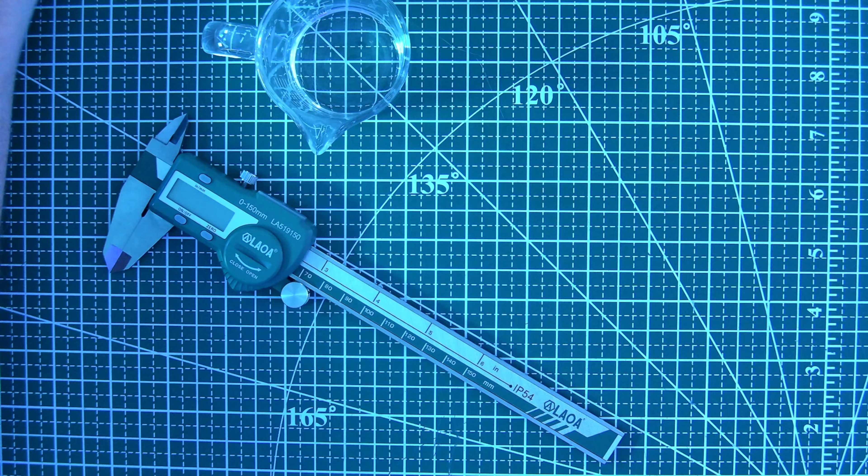So yeah, let's switch to the task, right? Oh, I need to use another mouse. Okay. Oh, I also need to... Okay. Wonderful.

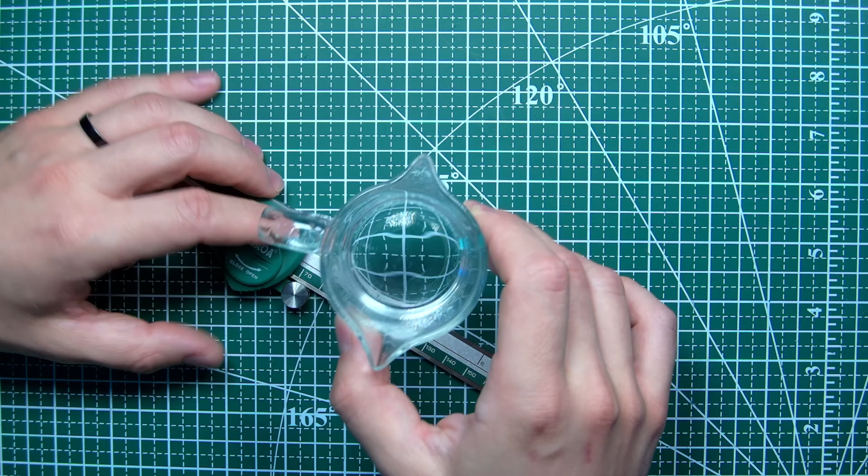So what do we have here? We have this espresso cup. I'm also learning how to make a normal espresso. Right now I can only make something not great, so maybe we will talk about that also. So here we have a two-dose espresso cup, right?

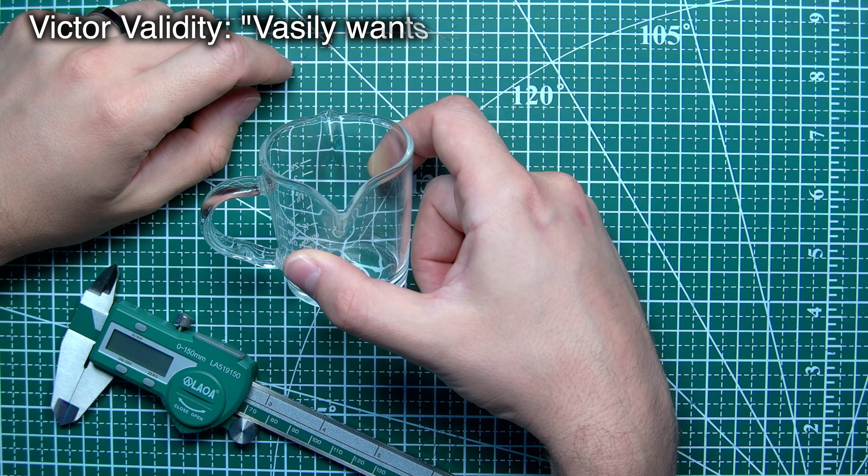So what is the problem? I also have a bottomless portafilter, and I have a lot of space between my portafilter and this cup, right? And with a bottomless portafilter, the coffee flow, a coffee thread, oh my god, I'm using programming words, the flow of the coffee, when it's going here, we may also have drops of coffee everywhere, right?

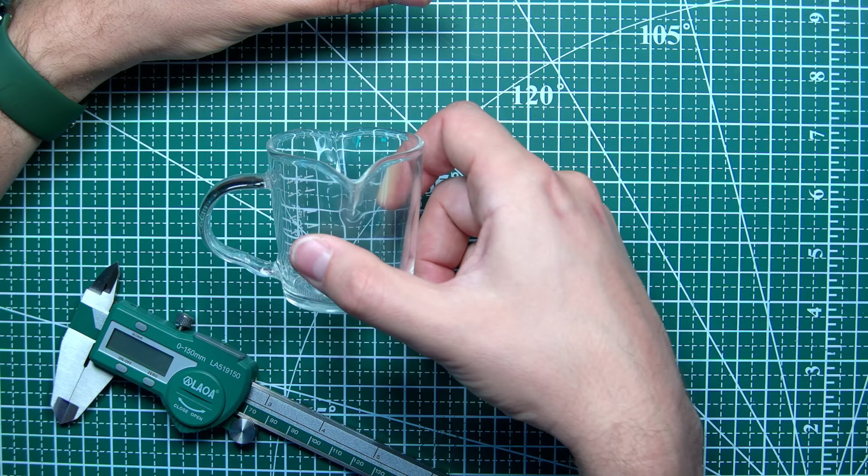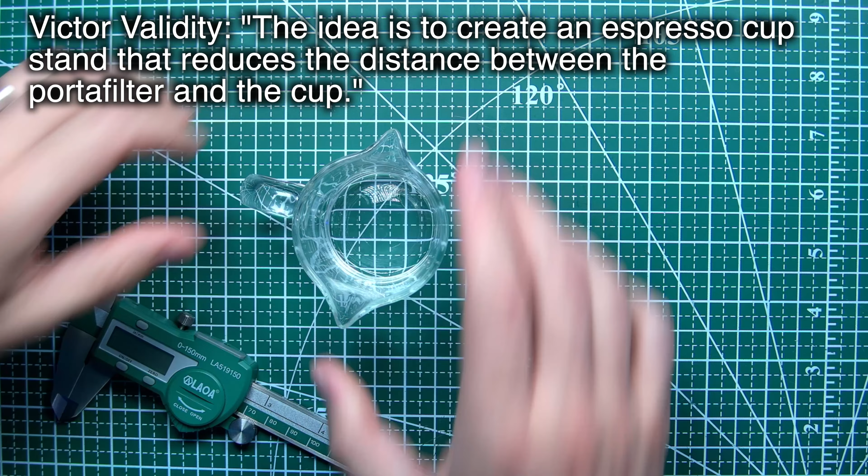So the idea is to have my portafilter and put this espresso cup as high as possible. So I need a small stand, right? Here I need a small stand. Okay, how will it look?

So I found something like this, but it would be smaller. So, okay. So I want to have this stand. So we will put our espresso like this, right? And also the diameter of it would be less, right?

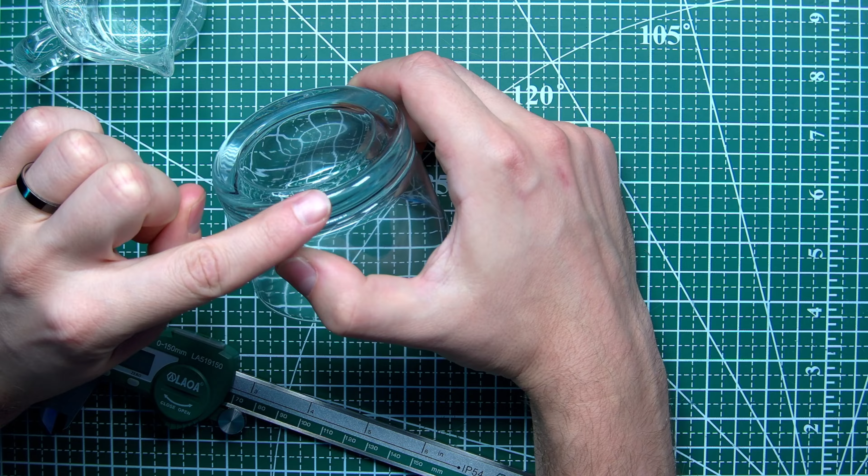And another idea, I want to have here a small border so that this coffee cup cannot be accidentally moved or something like this, right? So again, the idea is to have a small border, to have this kind of stand, right?

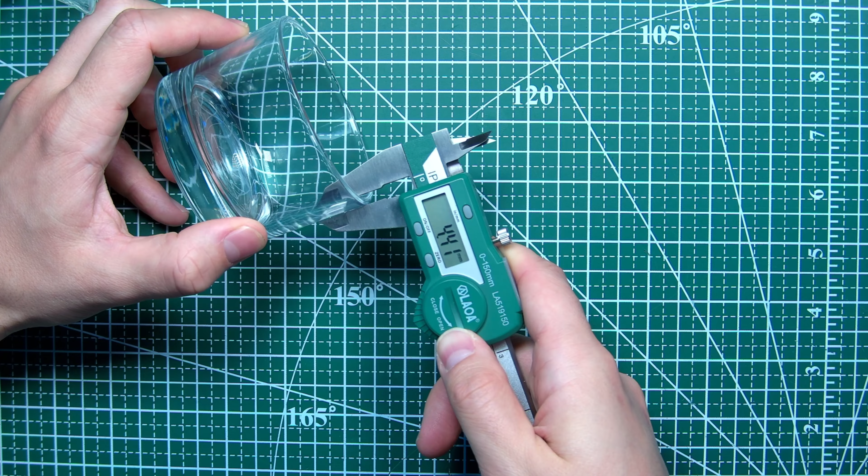And also, I do not want to fill it with plastic. I exactly want to have the same thickness of these, let's name them walls, right? Because I do not need to spend so much plastic here. And of course we will print it. Probably it could be another video, what result do we have.

So yeah, let's start. So first of all, what do I need? I need to measure this, right? So to measure this one, okay.

Oh my god, yeah, sorry, I'm not a professional YouTuber. I forgot to look at my screen to see where the cup is right now. I hope I will become better.

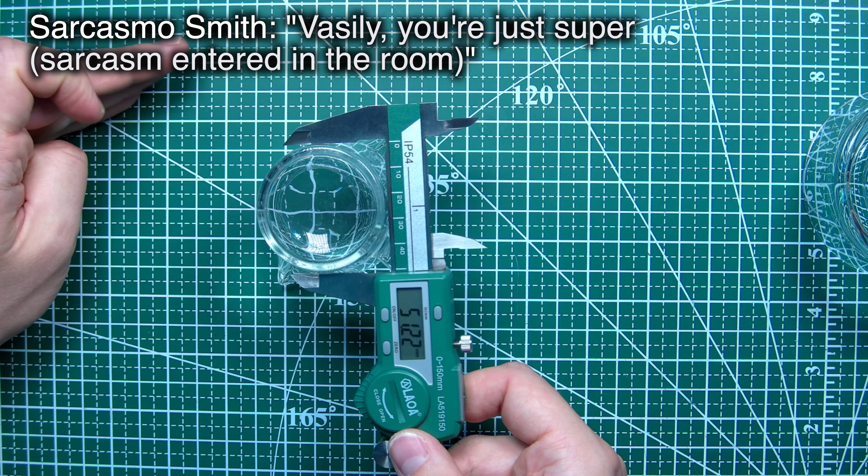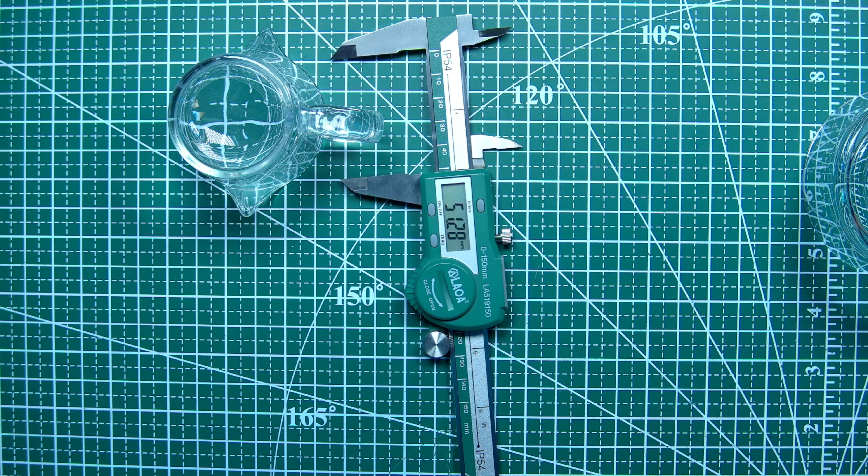So we have here something around 51 and 51, right? And 2 millimeters. Let's keep it for right now, and let's move to our project and start our project. So let me switch to my desk. So this one, wonderful. Okay.

So, as I said, I already created a project. Let's try to make another version, right? So create milestone, version 1.

Yeah, I had to delete the video, like 1 hour. Regularly I am recording videos of 1 hour.

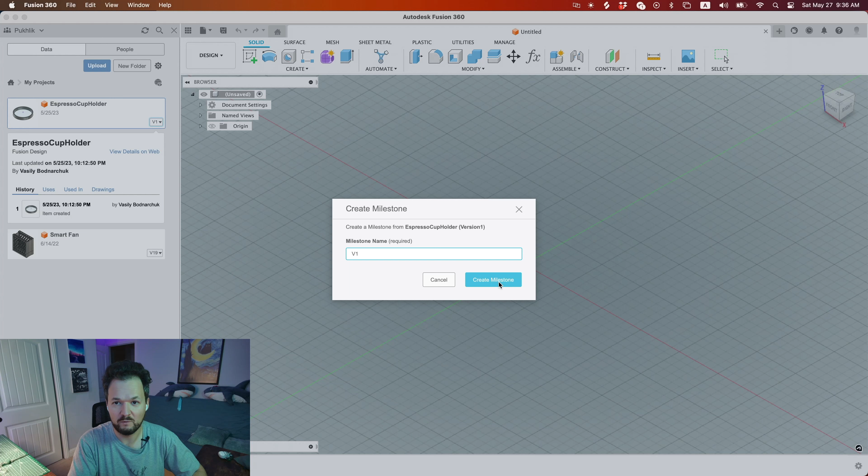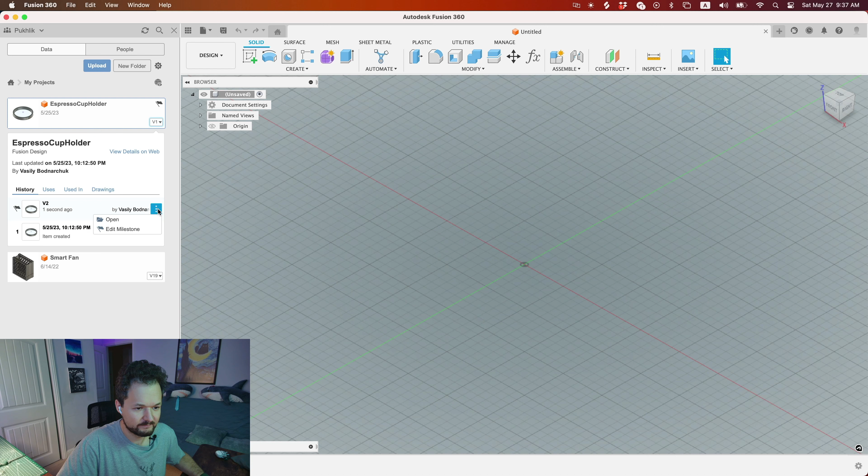Okay, so let's create a milestone, and then let's try to create another version and start from scratch. So, okay, and let's open it. Okay, this is version 2, right? And this is version 1. Let's rename it. Okay, I cannot rename it. Let's open it. And let's remove everything from here, right?

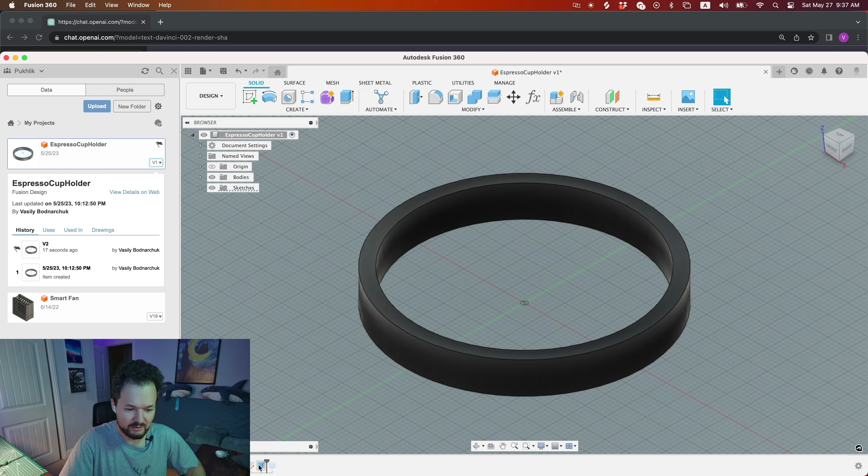Oh, okay, let me try to move this dock to another side of the screen. So position left. Okay, hope right now it will not distract us. And let's remove all of this. All right, let's start from scratch. Let's remove everything. Yep, delete. Yep, I know what I'm doing. Delete. Yes.

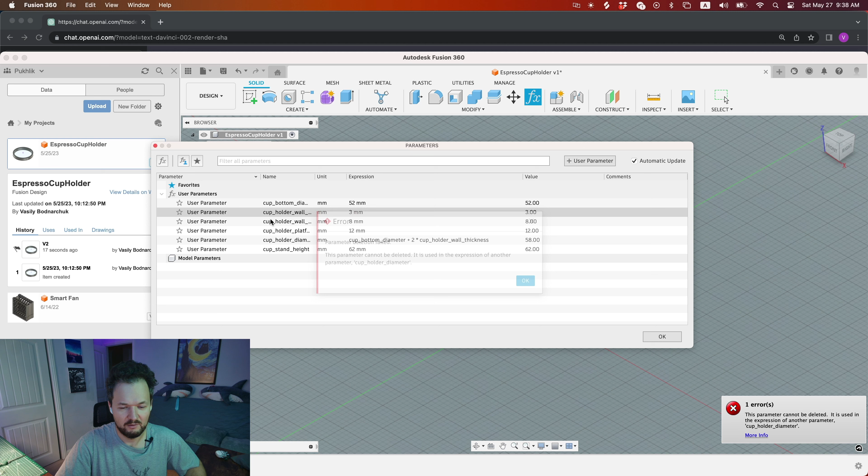Delete. So, and also we have parameters. Let's delete. Oh, why are they on another screen? Let's delete all of these parameters. Okay, I cannot delete them, so probably we will have this here. I hope it's okay. So we have here parameters, and let's start from a sketch.

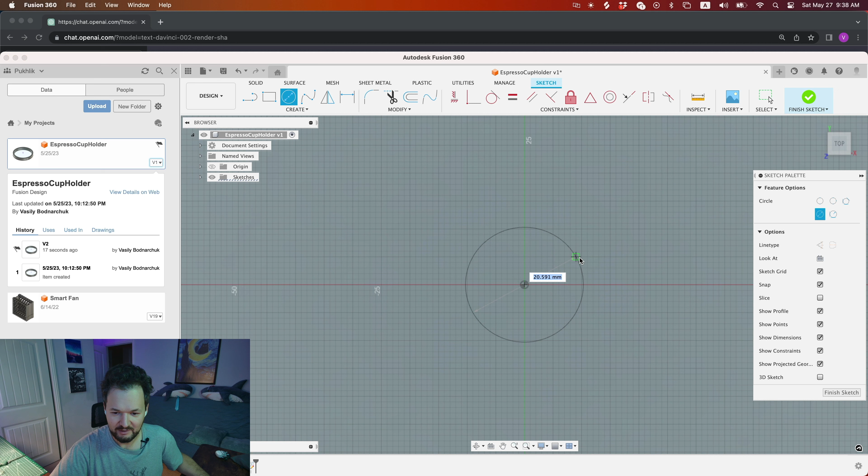So let's create a sketch. X, Y, right? Then we need a circle, right? Let me create it first, and then I show it on the model, on the cup. So this one, I can click on D, dimension, and let's set here. What dimensions do we have? These parameters I already entered.

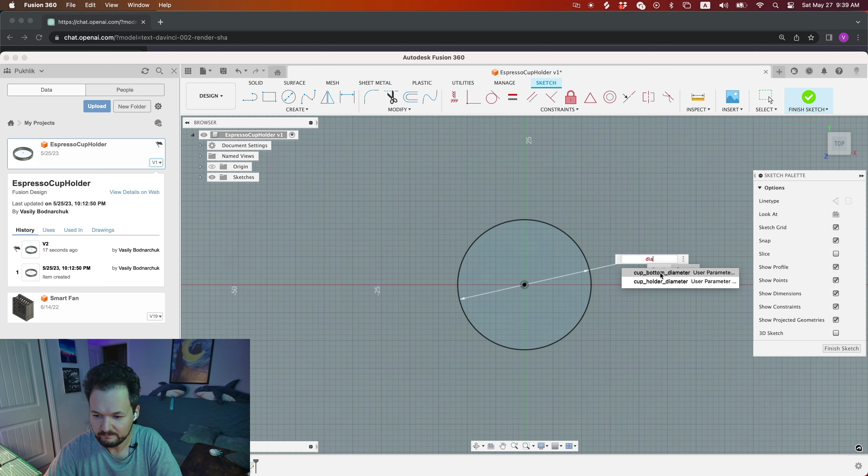So diameter, right? Okay, we have cup holder diameter. Looks like this is the whole diameter, right? Let's make it.

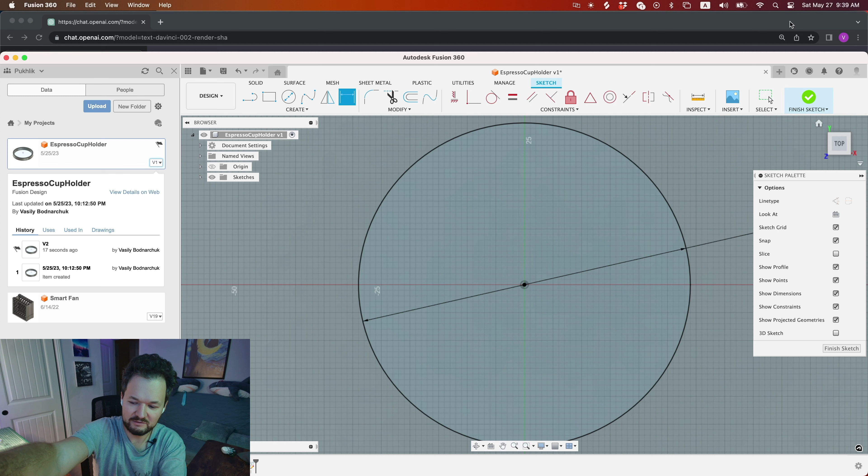Oh, I have another screen. I need to move that screen right now. Sorry, you see, everything is not professional. So, let's do this. Why can't it be? Okay.

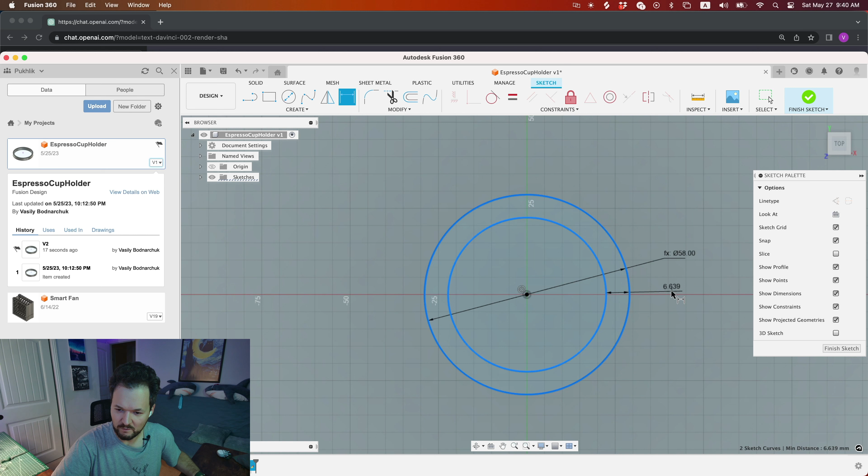So, 58 millimeters. This is the larger diameter, right? Now let's add one more diameter. We can set dimension D from here to here. No. Okay. Yes, that's what I wanted. And diameter. Okay, so cup holder wall thickness, right? Yes. Holder wall thickness. It should be like 3, right?

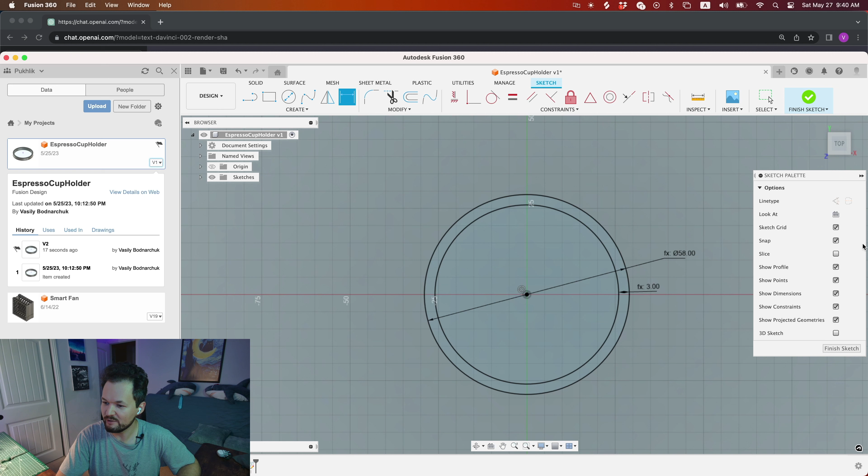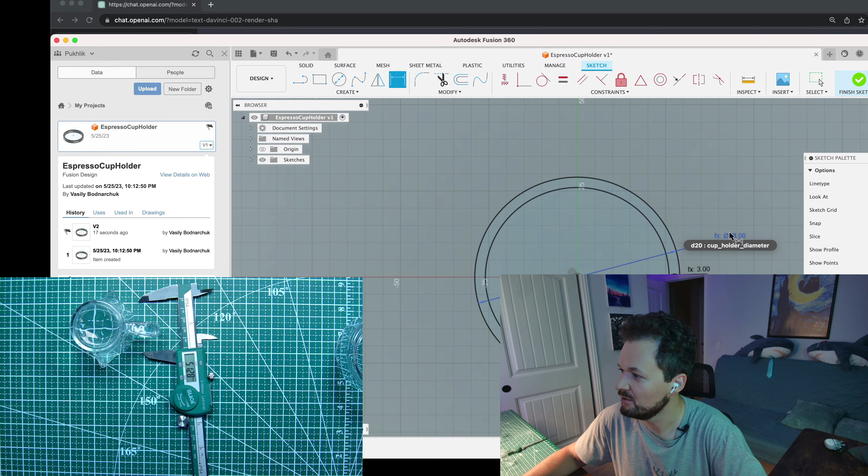So let me switch to another screen and we can discuss it. Can I try this one? Okay, this is too big. Let me make this smaller, and myself smaller. Actually, oh, it's wrong, right? This one. Okay. And actually you do not need my face here, right?

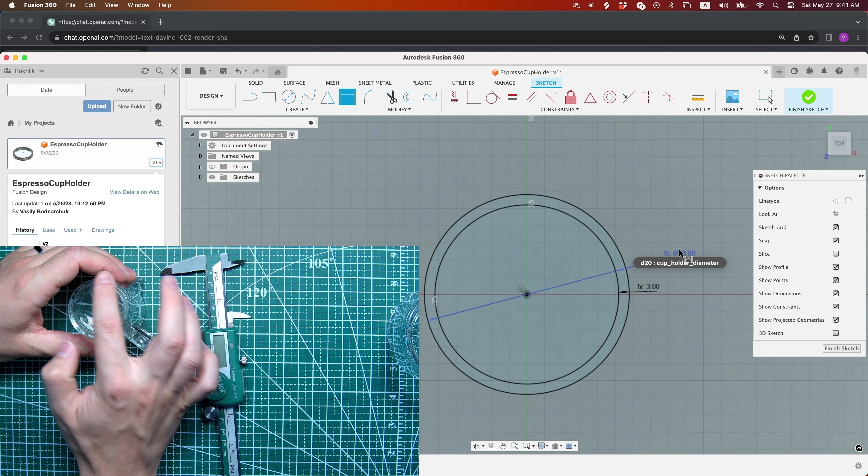Yep. So, look at this. We have this diameter, right? It is like 52, right? 52. Actually, let's check parameters. I think I set up a little bit different, right? So, like, okay. Oh yeah. Cup bottom diameter 52. Okay.

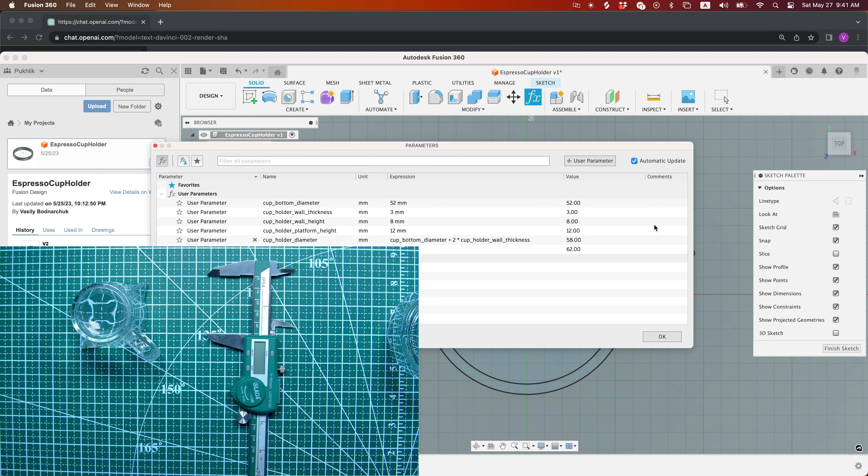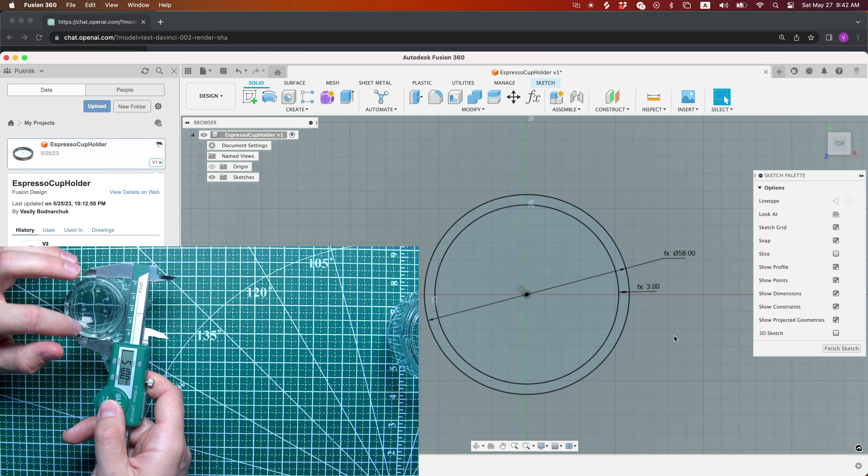So then we wanna have some border, right? So for border, as you see, we add 3 more millimeters, right? So this is specifically this diameter, like 52 millimeters diameter that will fit and hold this bottom, right? But we want to have a wall. So to have a wall, we need to add extra space, right? Like this. And these walls, they will go down, right? They will be in this position or something like that.

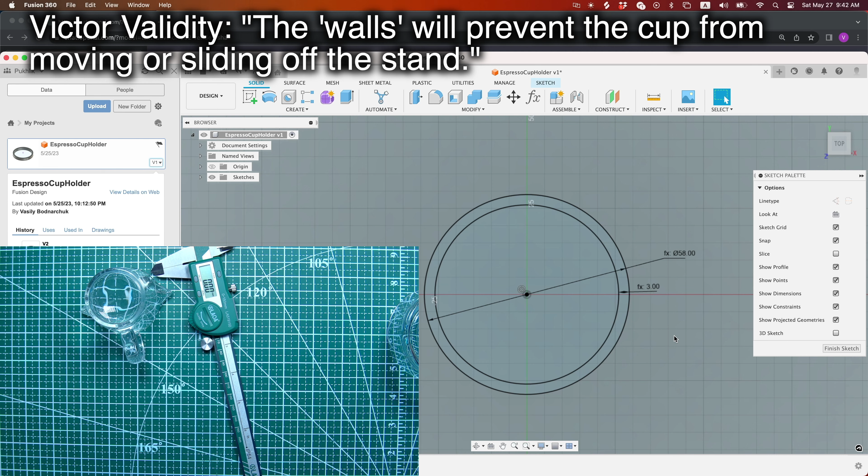Okay, yeah, sorry. Maybe my explanation is not wonderful. Okay, let me switch back to me, so that you can see me.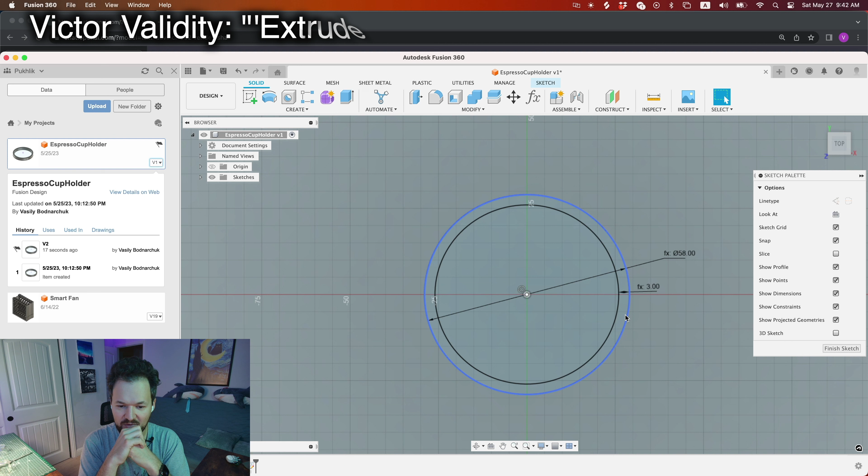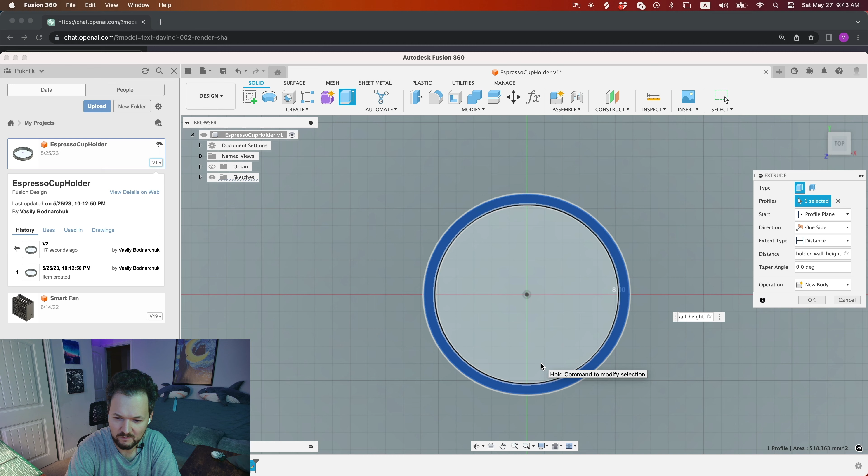Okay, so I described. So we have this wall, right? Right now we can extrude, right? So let me do this. Extrude means like create physical walls, right? And here we have height, right? So, let me see. Cup holder, okay, height, cup holder wall height. Okay, so, oh, no, it's incorrect. Let me do this, finish sketch, click on here. Actually, everything was correct, right? Cup holder wall height.

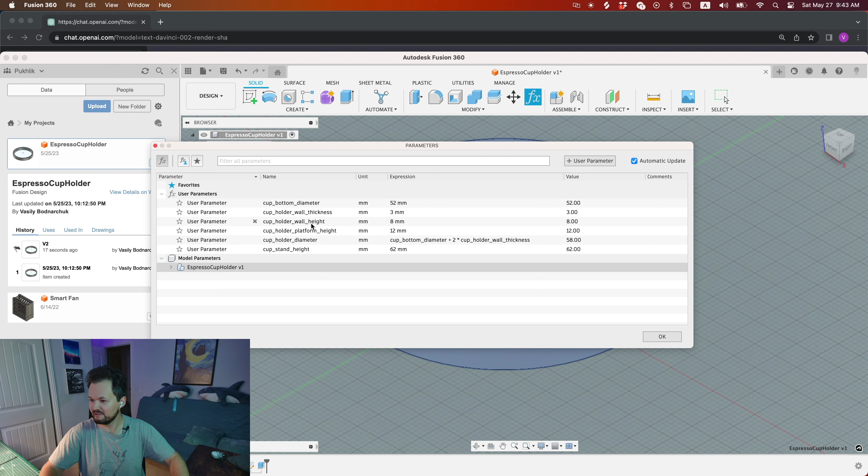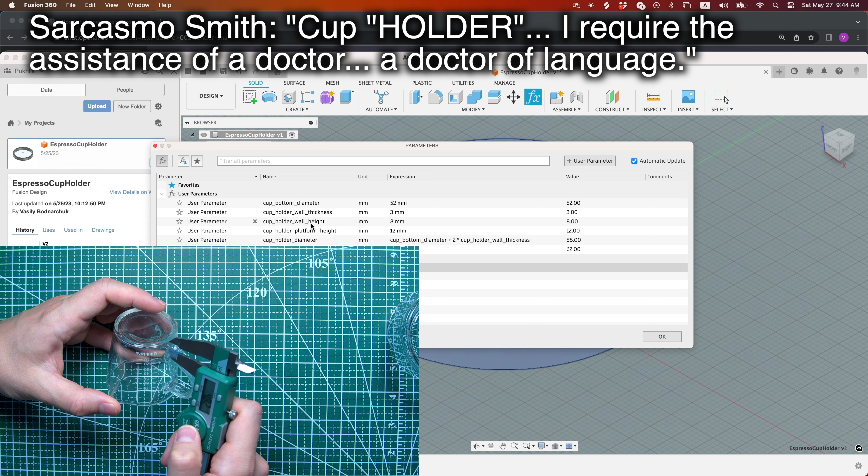Okay, and we have here like 8 mil, right? Let's open these parameters. Cup holder wall height 8 millimeters, right? Let's check how it can look. So 8 millimeters is going to be too much, right? Oh yeah, it's going to be too much, because I have this holder, right? So I need to make it 4. Okay, let's make them 4.

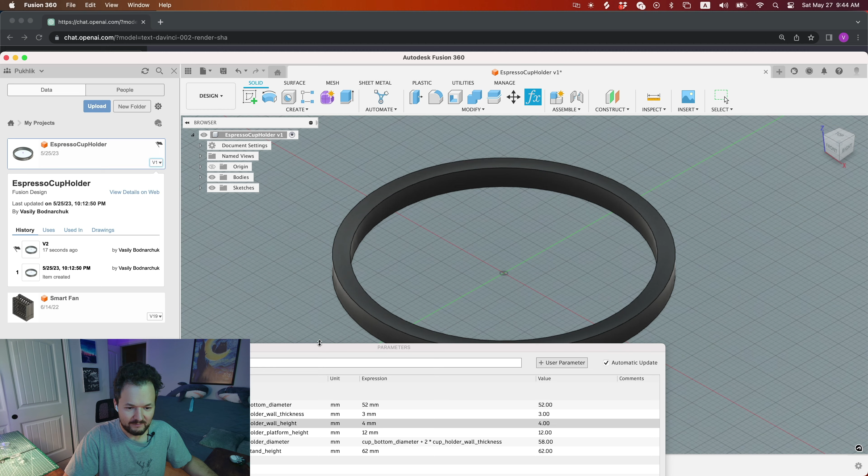Okay. So you can see right now, when I change this parameter, we will change the model, right? Boom! This is wonderful. That's why I like parameters. This is like programming. We have variables. Okay, and let's talk about naming. We have here a cup holder wall, we have cup holder platform, we have cup holder. So these are my names. I split the model into several models, like in my head. It's not like specific terms or something like this.

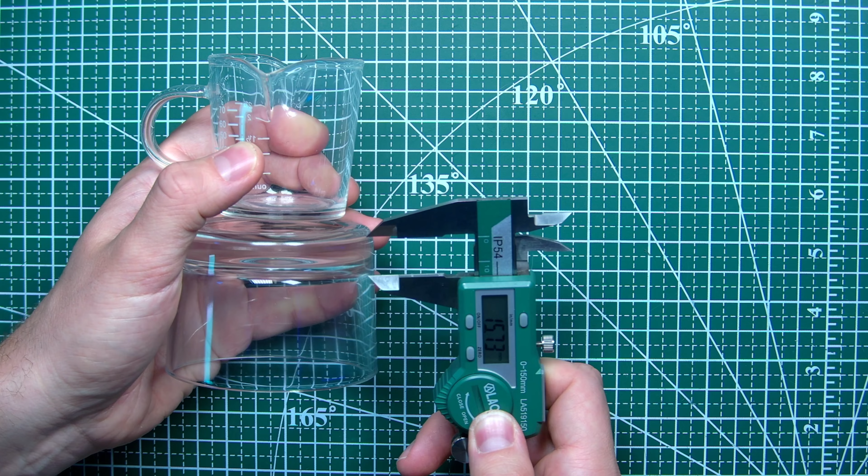So if we look at the desk, we have a cup. This is cup, right? Cup holder wall means the walls that will hold this cup, right? This is wall, cup holder wall. Then we are going to put here our cup, and that part I named as platform, and this is stand. Probably this is not normal English, but for me it's much easier because we are going to have several sketches.

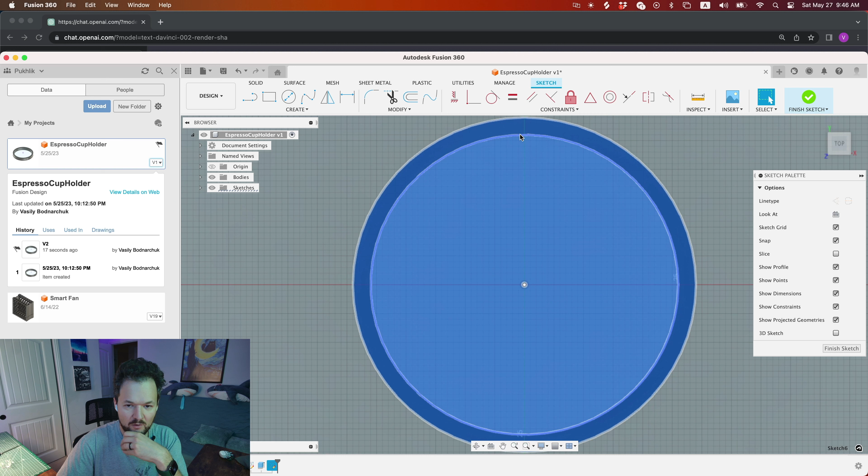Let's go back. So screen. Okay, wonderful. So we have right now this. We need one more sketch, right? Create this one. Okay. And what we are going to do, we have this sketch, and we need to create just one more surface. So actually, do we need to create? Maybe I can extrude. Oh no, because I need to fill all the space with plastic, right? Okay, let's do that.

So I need to have constraints, right? So I click D. Oh no, it's not ready. Let me open again. Where is this menu? Return to my sketch, please. How can I select it? I need to edit it. Come on, please. Why is it not working? Why can't I select this? Okay. Oh! No. Great. Okay. Yeah, it's right now selected.

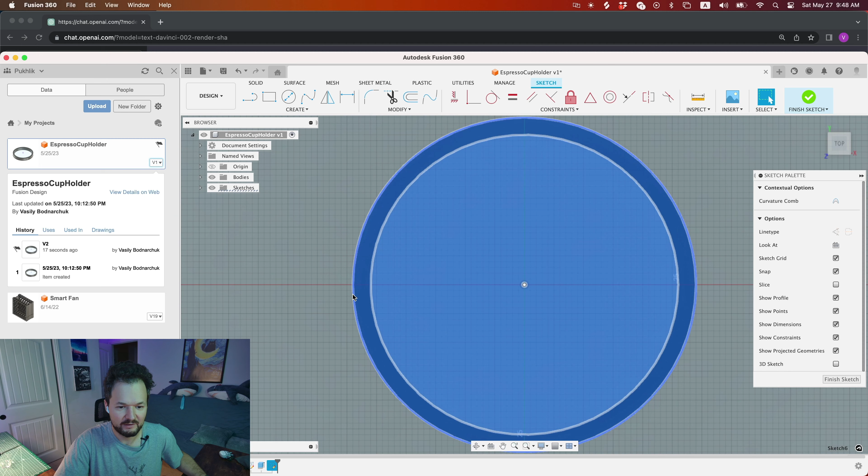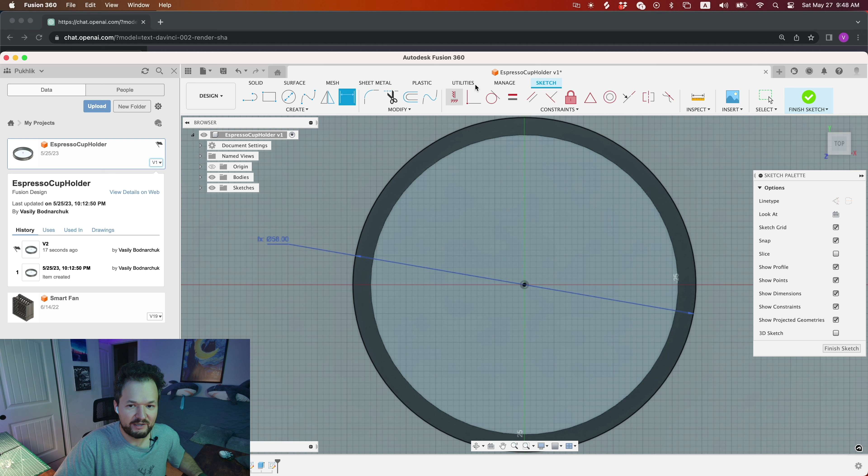Okay. So, I have this circle, right? And I need to also set here diameter. Actually, yeah, it's better to use diameter, right? And wanna have this. Okay. And we need a hole diameter, cup holder diameter, right? And right now we can extrude. So we have this one, and we can extrude that. No, not. Why? Oh, actually, yeah. Maybe we can.

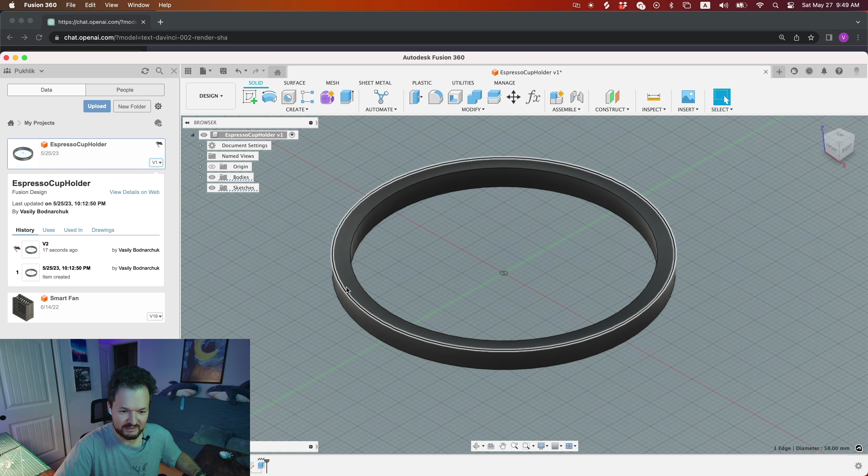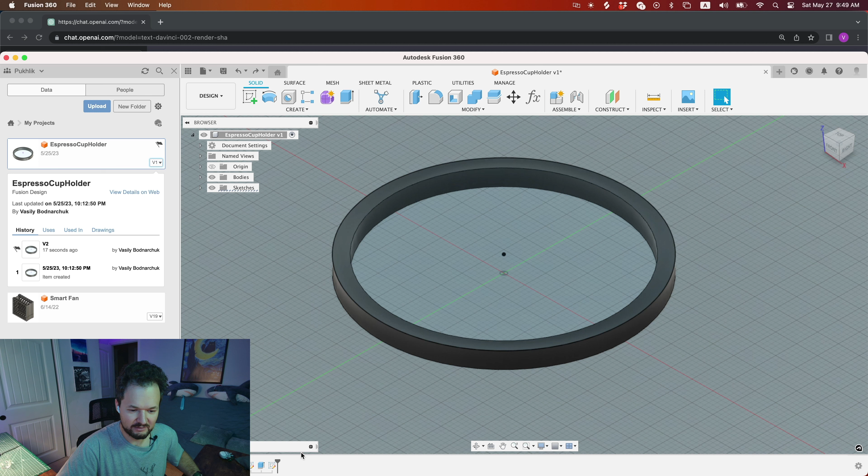Okay, let's try to do a different thing. We just extruded, right? We can try to select this one, and this one. Okay, I cannot select this area inside this circle, right? So if I return to my sketch, yeah, right now I can't select it.

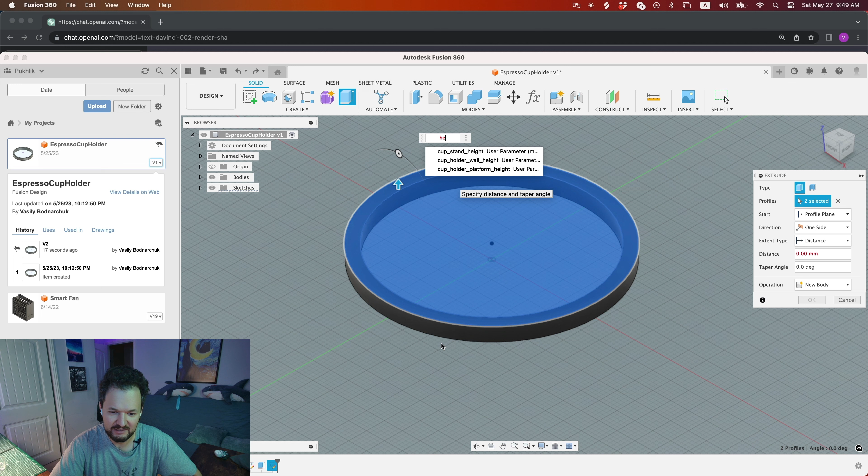Okay, so what I'm going to do? I'm going to extrude, right? To add physical walls, right? Physical surface. So it is going to be some kind of height. So we have a platform, right? Remember, this part, this is cup holder wall. This is platform, right? And this one that we added is platform.

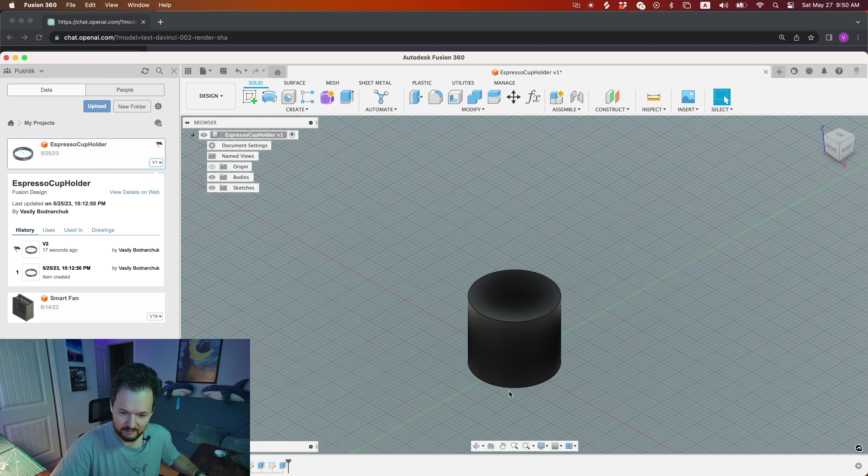Okay, let's click on it. And right now, what I wanna see, I wanna try to change it, right? Let's change it to, for example, diameter 12, right? And okay, let's see how it will go. Okay, how can I? Okay, not that one. Okay, oh, I forgot, right? So I can go here, and I can rotate like this. Okay, yeah, you can see that everything is good.

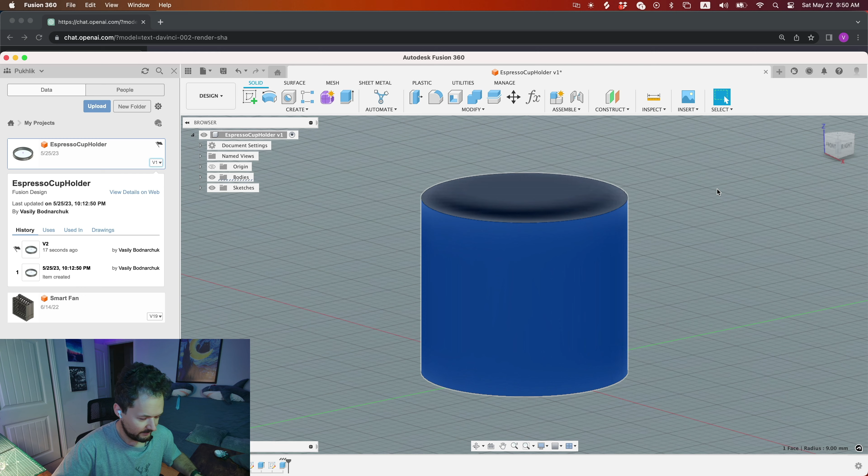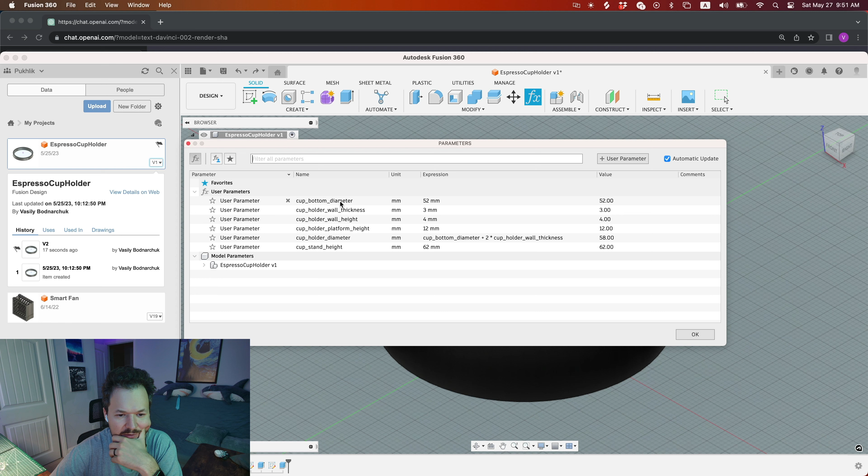So, okay, let's return back and make it bigger, right? And let's validate again. So we have cup holder diameter, right? So no, we have bottom. Oh yeah, cup holder platform. I think this is too much. We may have just like 6, maybe 4 millimeters, right? I mean, 6 would be okay.

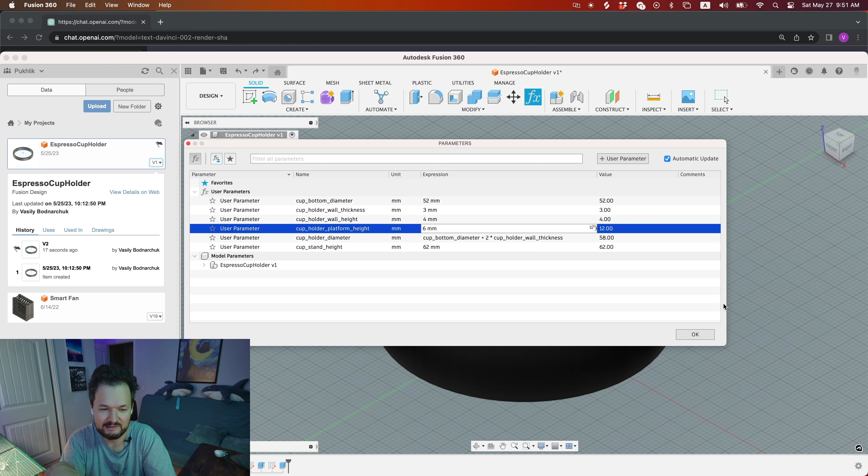I mean, when we talk about 3D modeling, as I correctly understood, it's important as an engineer, right? You wanna use less resources. The same in programming, right? You wanna use less memory. You wanna make less hard work and so on. So hard work means use less CPU resources, right? So yeah, let's keep 6 millimeters, right?

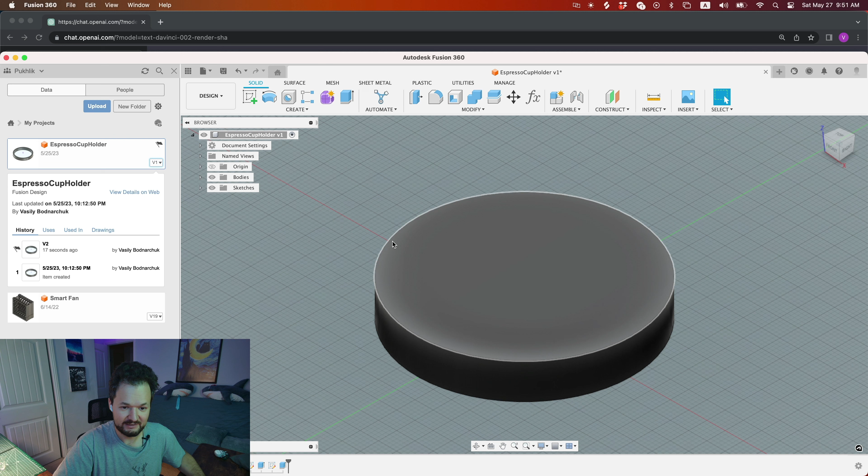And what do we need? We need one more sketch, right? So let me add this sketch again on the top of the surface, right? Maybe you know how to make this better. Wait, okay, and add sketch. Okay, the same. I'm going to have this one, right? I wanna say here diameter. Diameter is our constraint, and it will always keep it in this parameter, right? So constraints are our friends.

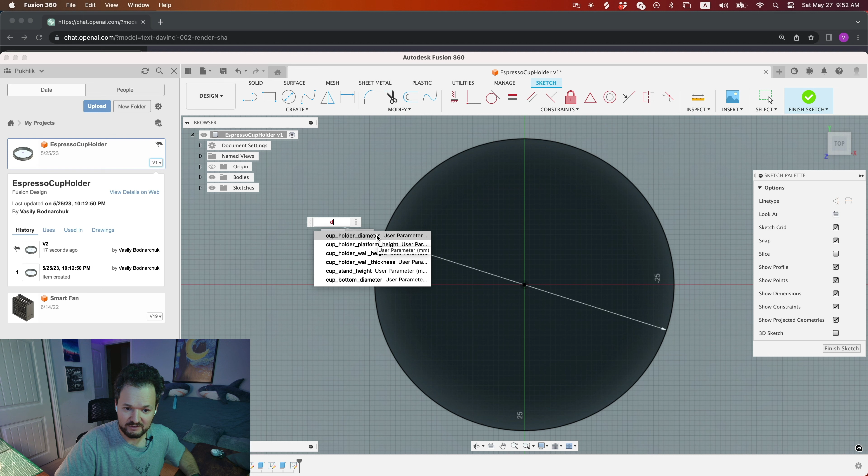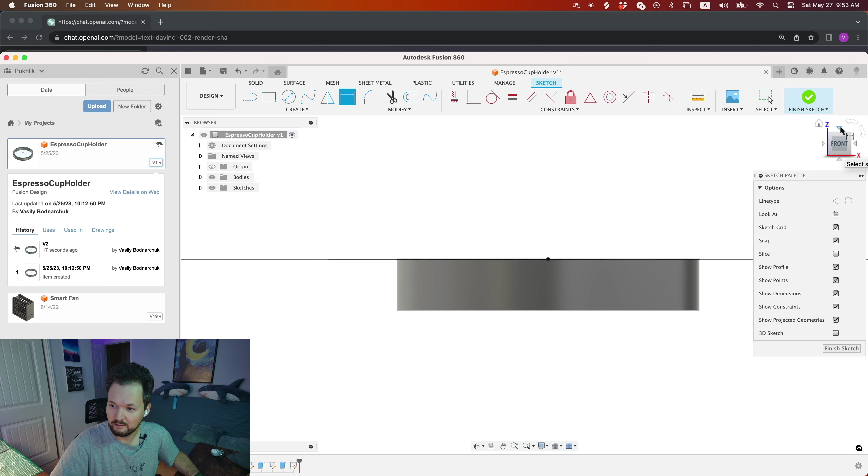Cup holder platform, what is this? So this is cup holder diameter, right? Yeah. So 58 millimeters, like a whole diameter. Wonderful. So what is gonna happen next? No, I didn't finish it, right? Okay. I need to have another diameter, right? So for right now we can have the same thickness, the same wall thickness, right?

So we have cup holder walls, right? Things that will hold the cup on the top and will not allow it to drop accidentally, right? To move. So let's try to keep the same thickness that we have on that cup holder wall. So let's add dimension. This one, and probably we can change it later, why not, right?

Yeah, so I'm slow, because I'm not prepared. I hope you enjoy it.

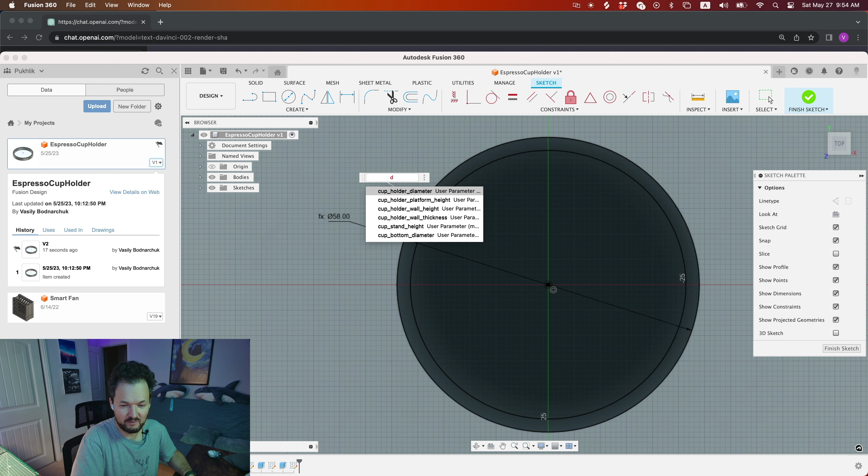So cup holder diameter, not diameter, come on, wall thickness, cup holder wall thickness, right? So let's also add one more property. So we have user parameter. So I have 62 millimeters, right? And what is this? Let's jump to our desk and think about it.

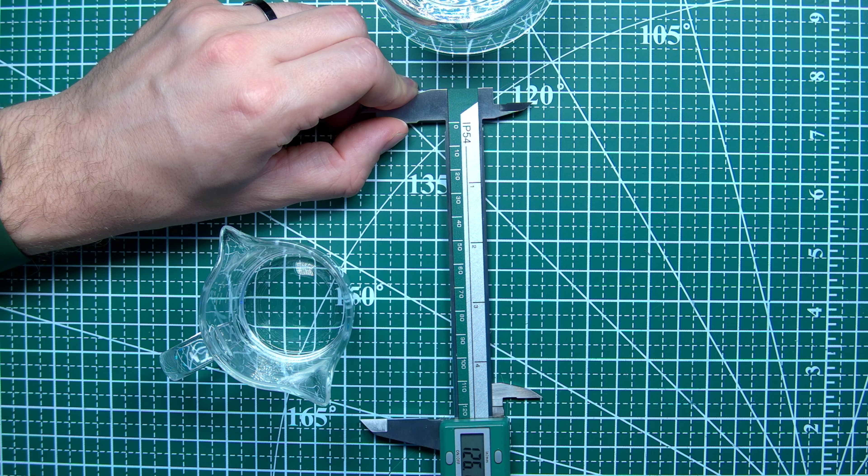So in total I have something around 125 millimeters height between the portafilter and the bottom of the coffee machine, right? So probably what do I need? Do I need to define all these properties, right? Probably yes, right? So let's do this. I can define the whole maximum height, right? And also I can define this cup height, 62, 61, 62, okay. So let's go back.

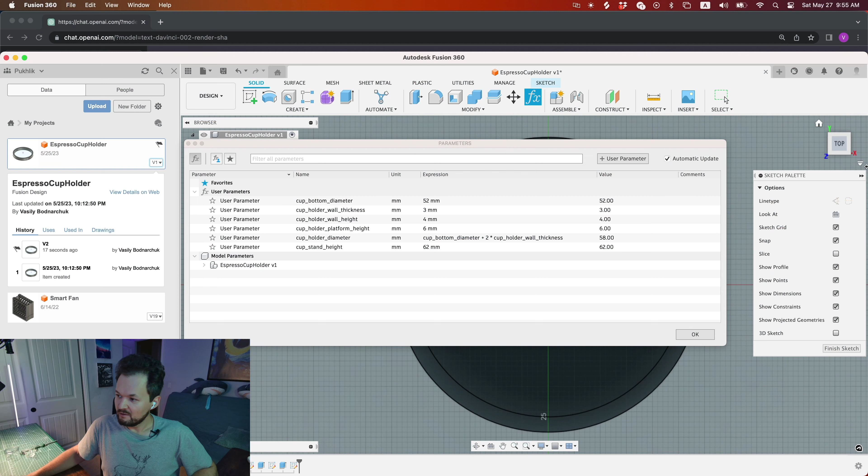So let's add user parameter, and we have espresso cup, voila, and cup with holder maximum height. No, just cup, just espresso cup. Espresso cup height. And as you saw, it is 62 millimeters. Okay.

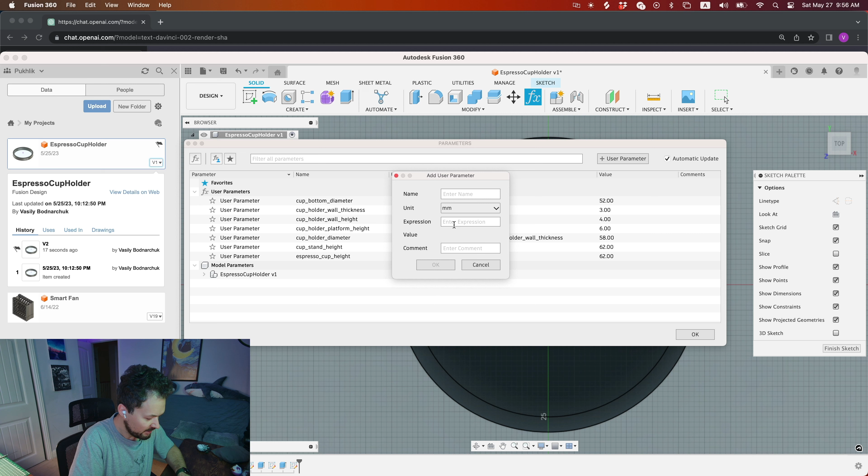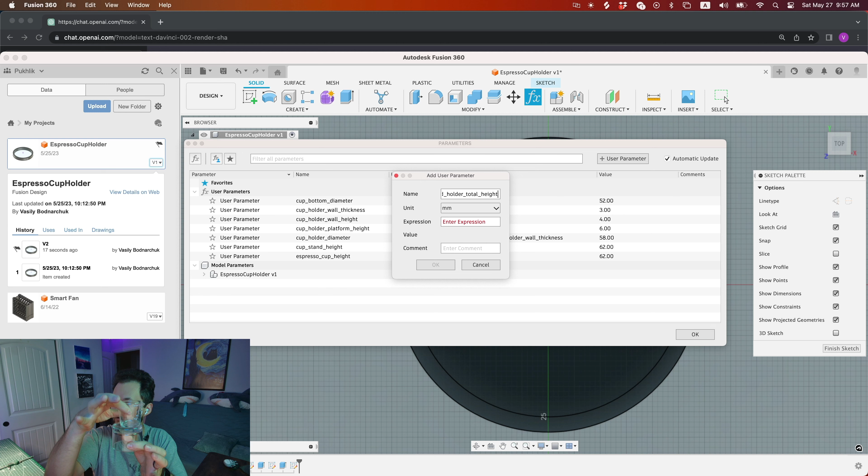Right, now let's add one more parameter. It is going to be cup and holder total height. So like the cup together, right? Like we have this, and what is going to be the distance, right? Full distance, full height. So okay, we have 125 millimeters, right? And right now we have cup height, right? What does it mean?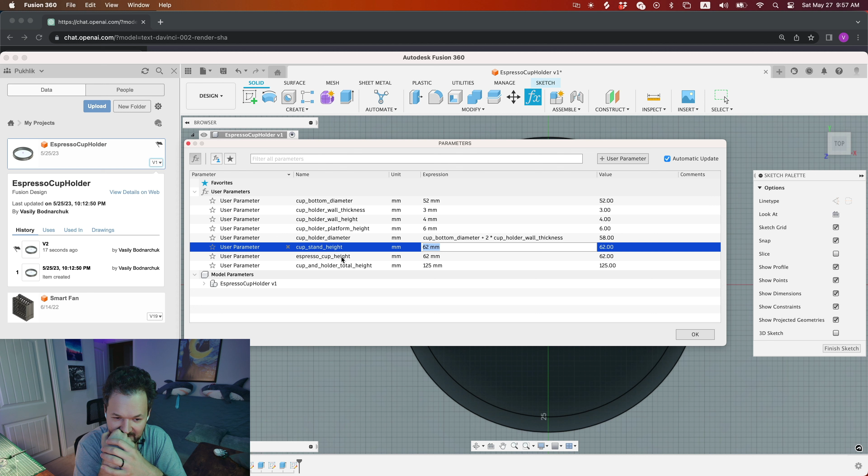Let's see, so we have parameters, right? So okay, let's add one more property. Cup holder total height.

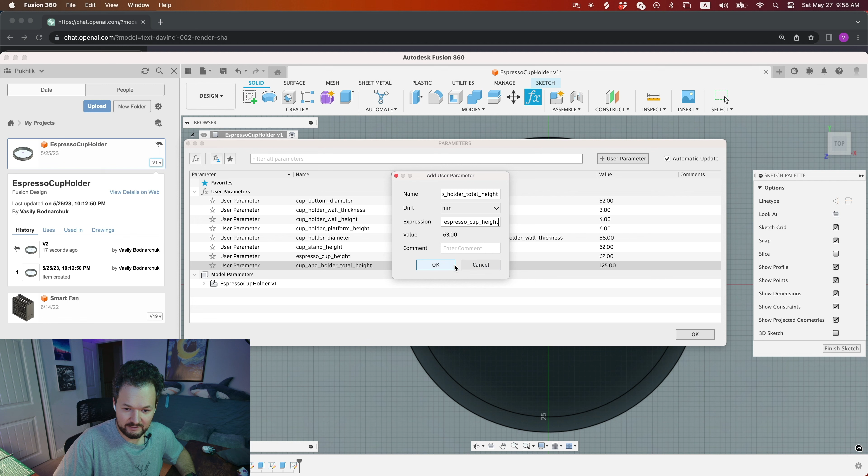So what is it gonna be? So we will have cup and holder total height minus espresso cup height. Okay, 63, right? We have 63, but we already extruded that distance, right? So if I move it here and I click on here, we already have this distance, right? Let's also remove. Because we're talking about just the stand, meaning from this point and upper, right?

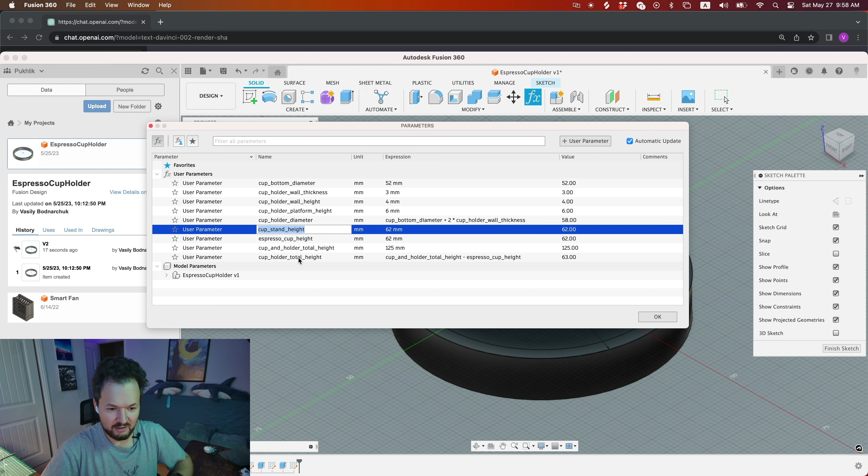So let's add one more property. Or maybe no, we may use here cup holder, right? Cup holder height minus what? Minus cup holder platform height, and minus what? Minus, we have another height here, right? So espresso we just added, we have one height. Oh, and cup holder wall height. Holder wall height. Let's check.

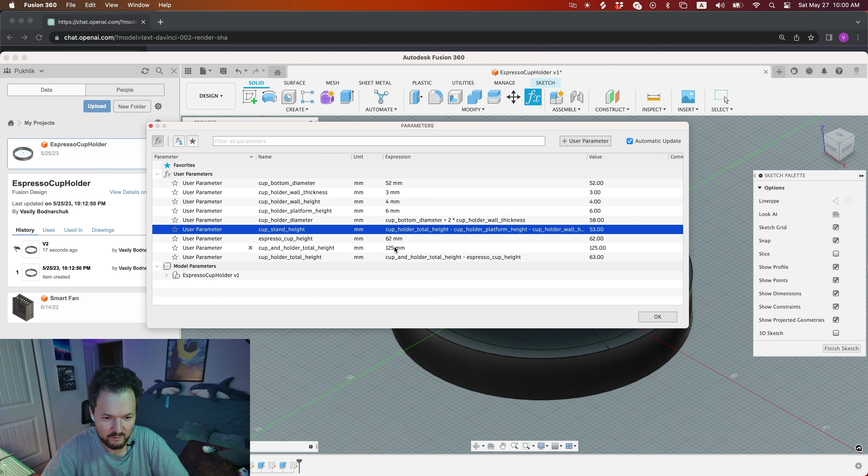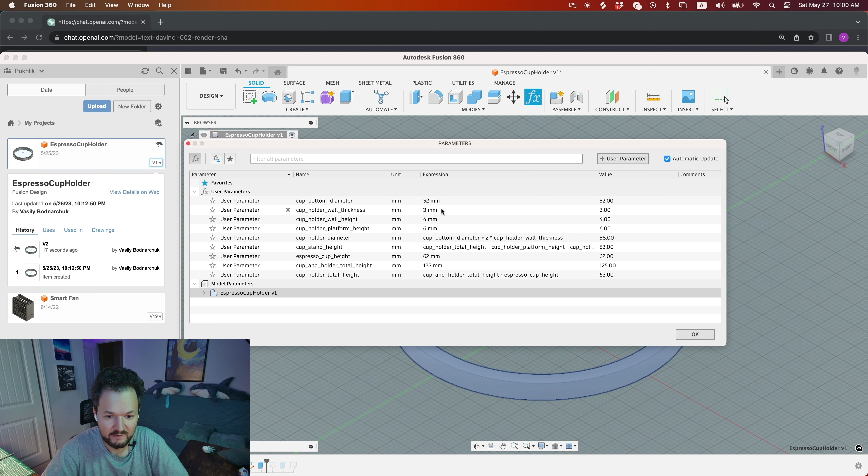So right, 125 minus 62, we will have 63, right? From 63 we can subtract this height, right? 6 millimeters. So it's the first part. Let me show you that part, right? Okay, that part. This is 4 millimeters, right? And then our platform. Okay, so correct, and we have a height of a stand. Let's extrude that. Come on, I need to move. Okay, so let's extrude.

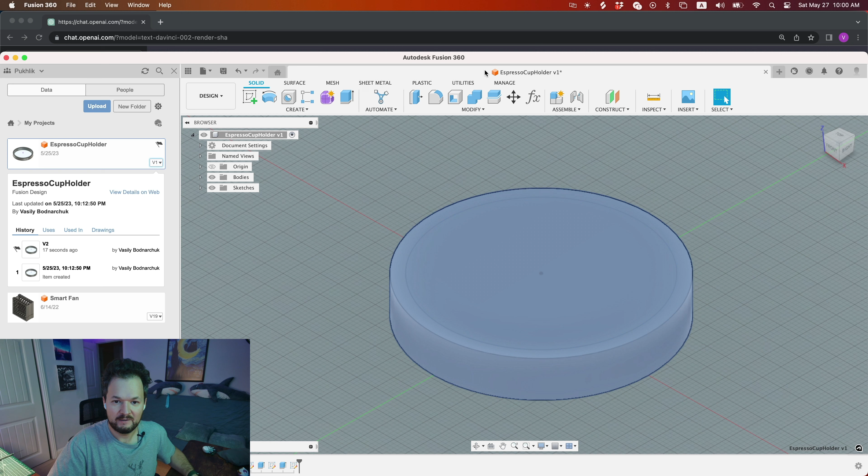You know what? This is going faster. Actually, second time it is faster. Previously I spent a whole hour, and right now we have 33 minutes, and I'm talking a lot, right?

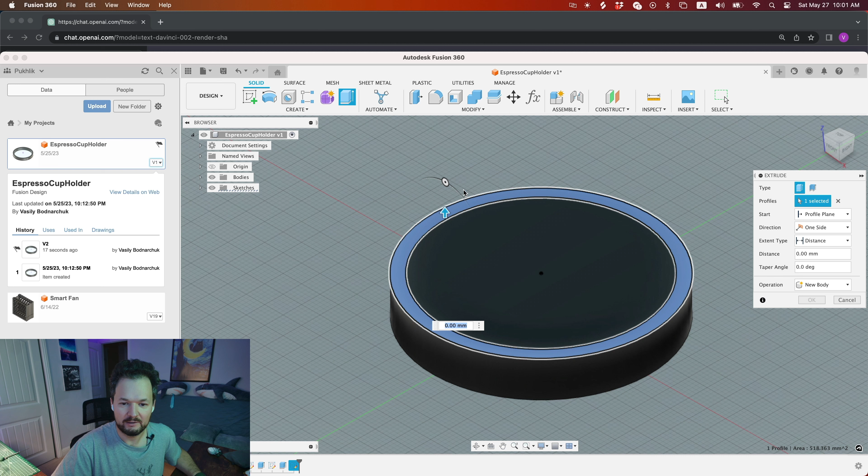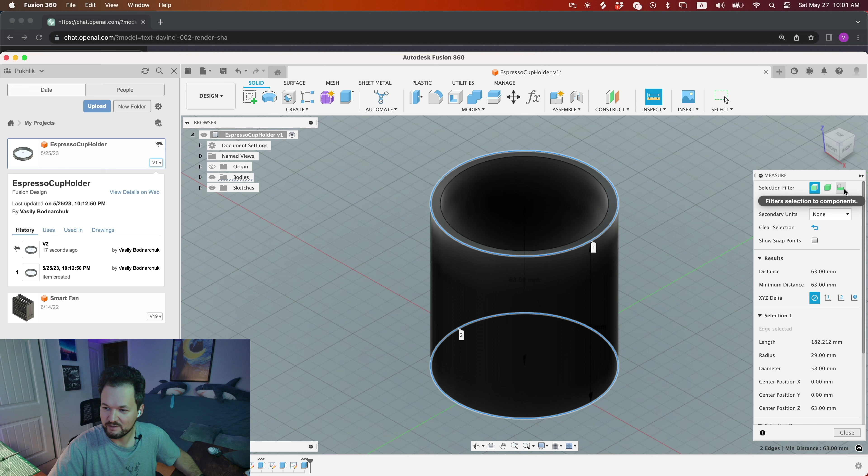Okay, so we have height here. What height? Cup stand height, right? Okay, and right now let's see this and let's try to measure it. Inspect, from this to this. Distance 63. Correct. That's what I wanted, right? A total distance of 63. Great. Let's have a fast review of it. So I wanna rotate it and see. Yeah, it's very simple, right?

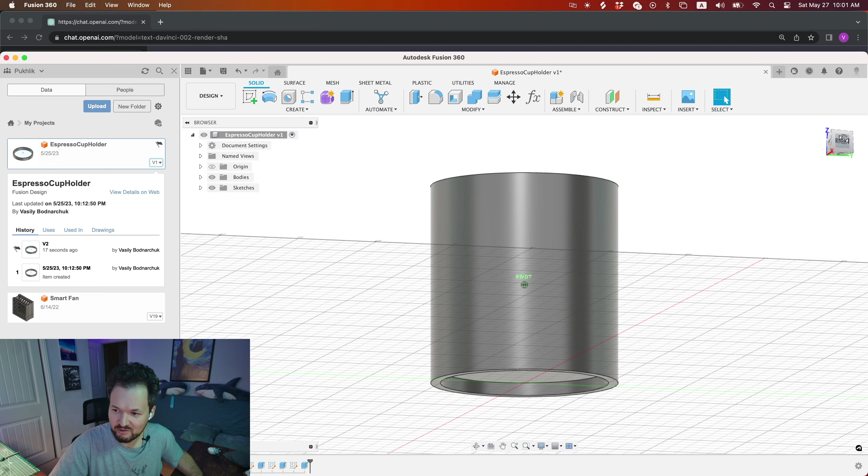I mean, probably I can make it better, but I have no idea how to make it better. Maybe together we can learn and add more beautiful things after some time, right? Suggest me something. How can I make it better for this wonderful cup? For example, maybe we may update this thing, let me switch it. When I finish making wonderful coffee, one day I feel I will make a wonderful coffee, I can put it like this, right? So I need here a space for the arm. Maybe we can do this, right? Why not? But for today, my knowledge is very limited. Let's see how it will work.

I mean, I'm excited to watch this video with you maybe in 2-3 years, like the second modeling video, right? So yeah, I will print it and we will discuss the result in the next video, because all my videos are kind of live, right? I am trying to develop that skill also, that I can speak clearly and you can understand what I'm trying to do, because it's not my language, I cannot from time to time formulate what I meant, right?

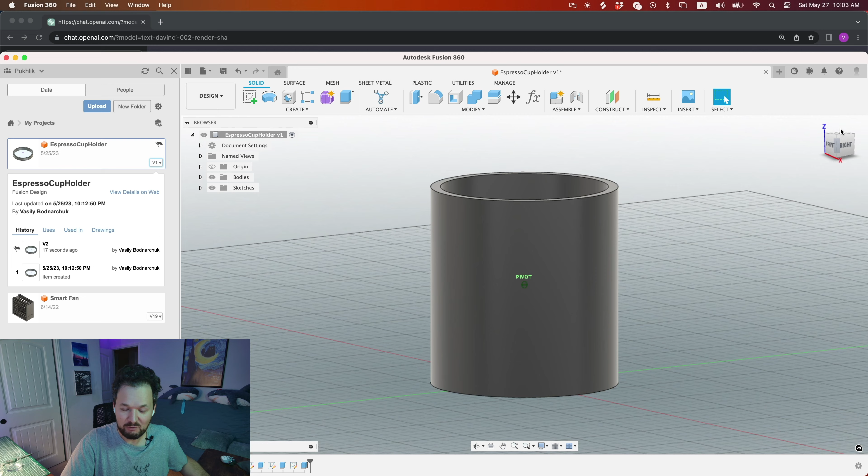Okay, so we have this wonderful stand. I will print it, and you can send me some more ideas, small things that we can design, and of course print everything I'm going to design. I wanna explore 3D printing more, because I think this is very interesting, right? And we have to explain to our parents, our girlfriends, our wives, why we bought that thing that took a billion square feet of space, that eats lots of electricity and makes lots of sounds.